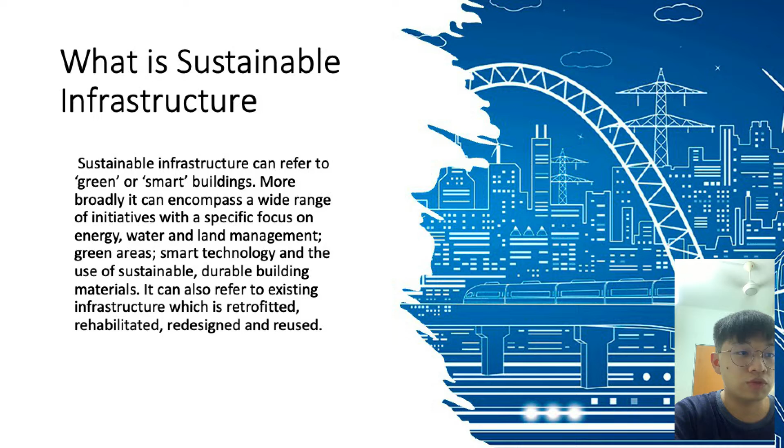Whatever definition is used, sustainable infrastructure is generally considered to approach development from a holistic viewpoint, based on global and domestic sustainable development goals and durability, and having regard to social, financial and political issues, public health and well-being, as well as economic and environmental concerns.

The needs met by infrastructure. Creating sustainable infrastructure means thinking in socio-cultural dimensional terms. It means being aware of how infrastructure influences people's life quality. It is therefore important to identify the needs that infrastructure must meet. This can be grouped into a few archetypes such as landscape, transport, hydraulic and energy.

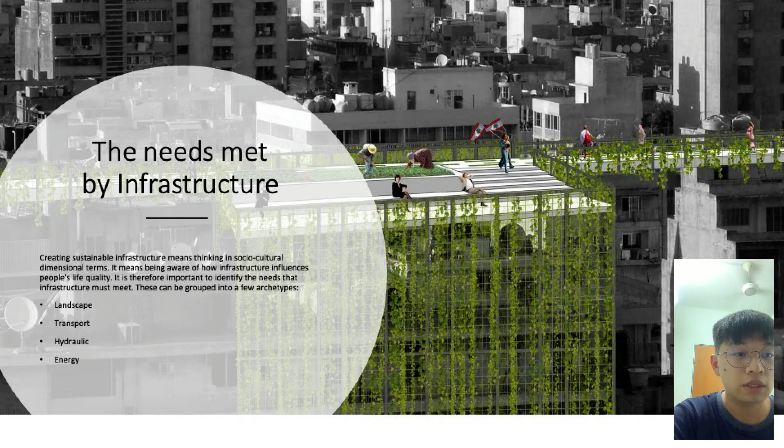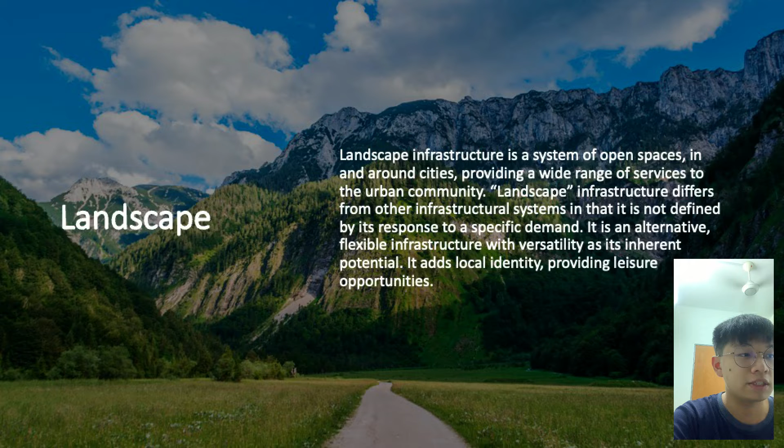Landscape infrastructure is a system of open spaces in and around cities, providing a wide range of services to the urban community. Landscape infrastructure differs from other infrastructural systems in that it is not defined by its response to a specific demand. It is an alternative, flexible infrastructure with versatility as its inherent potential. It adds local identity, providing leisure opportunity.

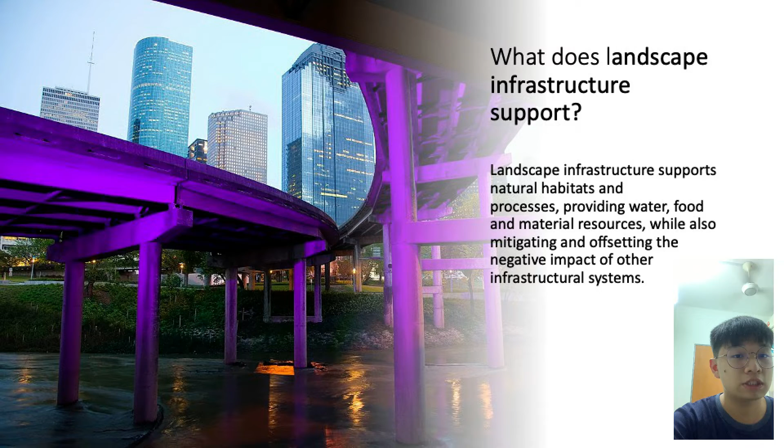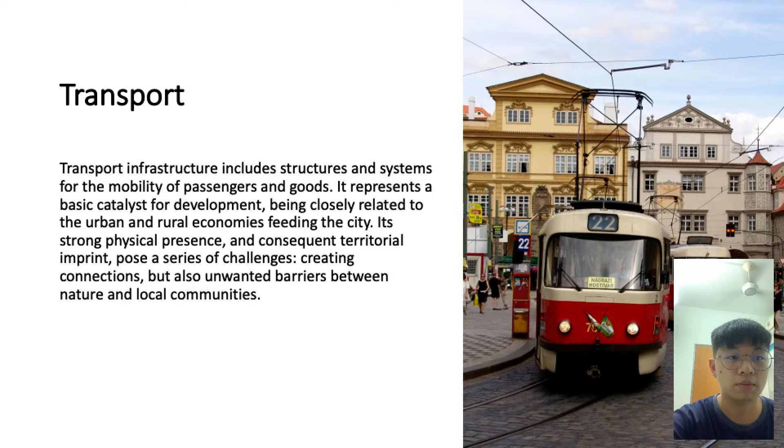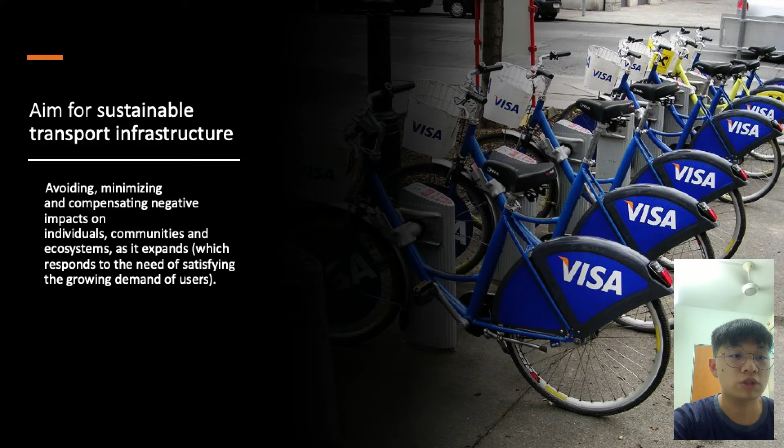The aim for sustainable transport infrastructure is avoiding, minimizing and compensating negative impact on individuals, communities and ecosystems as it expands, which responds to the need of satisfying the growing demand of users.

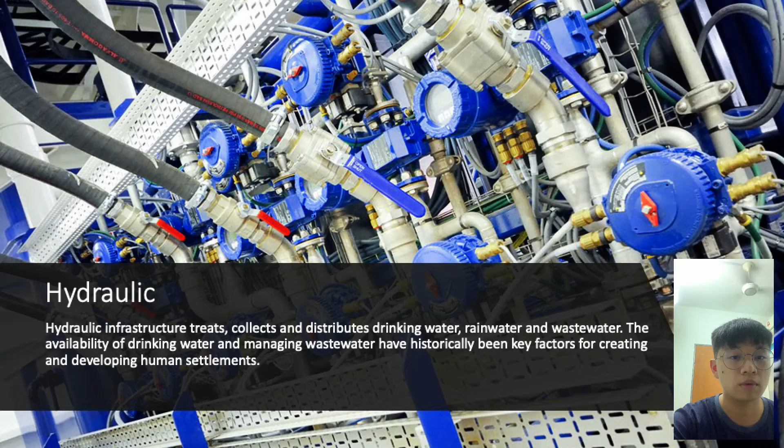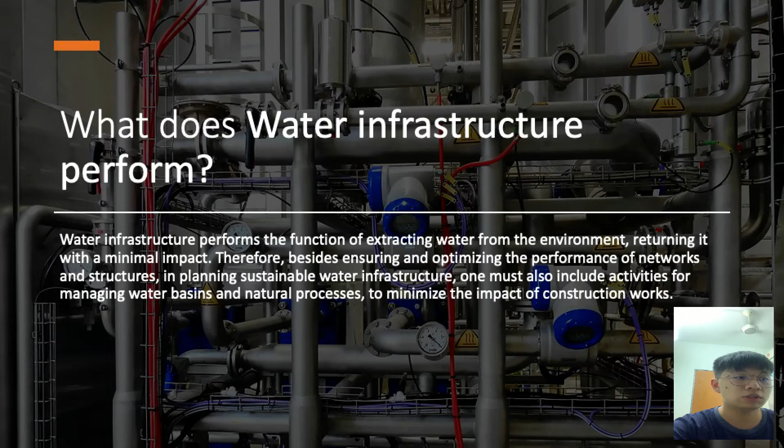Energy infrastructure manages and converts available natural resources into energy carriers like electricity, heat, and fuel, distributing them to end users. Energy security and stability are essential for greater life quality, economic development, and consequent social stability.

However, energy production is currently the main source of greenhouse gas emission on the planet. Why should sustainable energy infrastructure ensure constant and equal access? Energy is at the core of all efforts to ensure the sustainability and resilience of plants and their related industries. Sustainable energy infrastructure should ensure constant and equal access to energy, while also promoting increased rational use and more efficient practice.

Next, the goal for energy infrastructure is to aim at using natural resources with a regenerative capacity, providing renewable and low-emission alternatives.

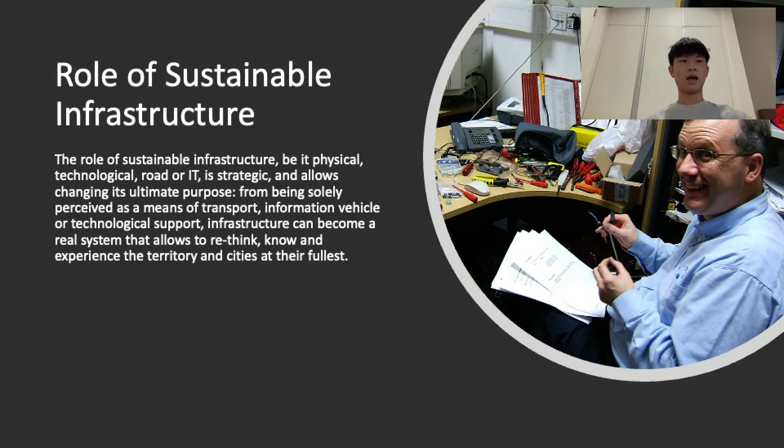Policy measures can involve developing clear and supportive policy and regulatory frameworks and enabling environments to ensure that sustainability and resilience become embedded in planning and investment criteria, both for public spending and as a signal for private investment. This includes observing INDC commitments by implementing domestic legislation to make emission reduction and reporting mandatory, and including sustainability criteria in procurement processes and investment plans.

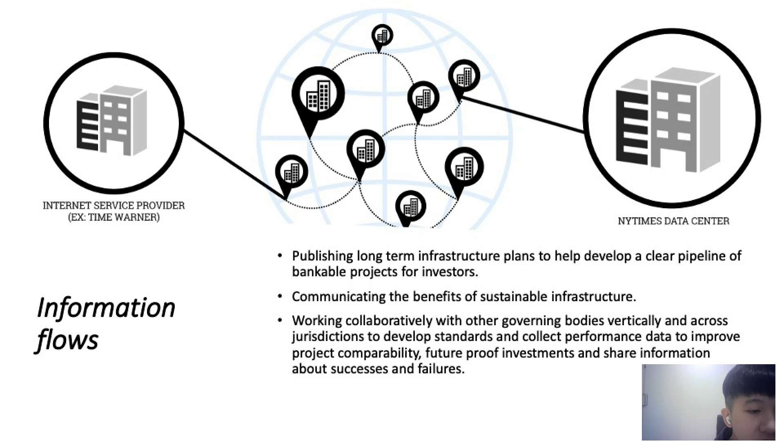Information flows can include publishing long-term infrastructure plans to help develop a clear pipeline of bankable projects for investors, besides communicating the benefits of sustainable infrastructure, developing standards and collecting performance data to improve project comparability, future-proof investment, and share information about successes and failures. Lastly, working collaboratively with other governing bodies vertically and across jurisdictions to help develop standards and collect performance data.

Mobilizing finance can involve developing financial and tax incentives and financial support mechanisms. It can also leverage public funding and credit enhancement mechanisms to attract private investment. Not only that, mobilizing finance can also fund the upfront costs, which make sustainable infrastructure projects initially more expensive than conventional projects, as well as boosting capital markets and developing standards for green bonds.

In conclusion, the development of sustainable infrastructure will require a combination of sustained support and participation at the governmental level, commitment to public and private investment, and a legal and regulatory framework that permits growth whilst governing the social, economic, and environmental standards that are the basis of sustainability.